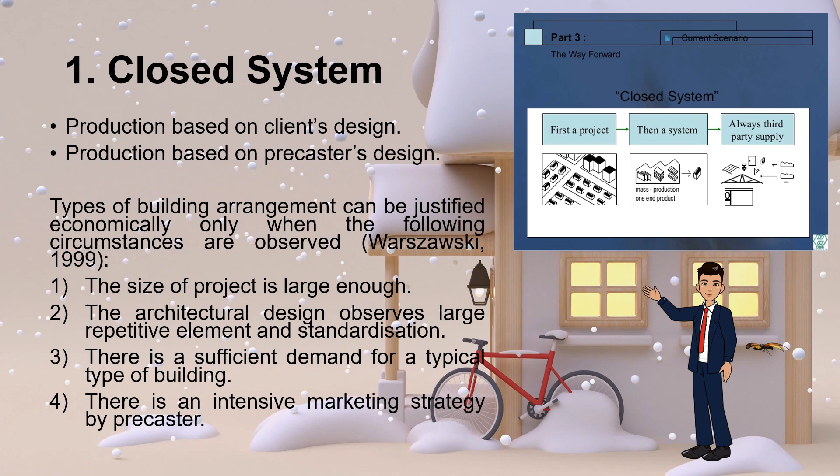In respect to this, a novel prefabrication system can overcome the requirement of many standardized elements by automating the design and production process. Number 3. There is a sufficient demand for a typical type of building such as school so that a mass production can be obtained. And number 4, there is an intensive marketing strategy by precaster to enlighten the clients and designer the potential benefit of the system in terms of economics and non-economic aspect.

In view of the limitations inherent in the closed system, an open system, which allows greater flexibility of design and maximum coordination between the designer and precaster, has been proposed. This system is plausible because it allows the precaster to produce a limited number of elements with a predetermined range of products and at the same time maintaining architectural aesthetic value.

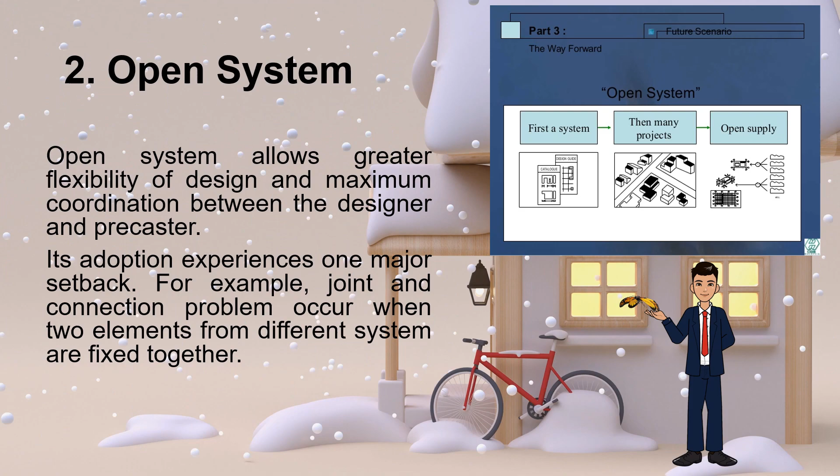In spite of many advantages inherent in an open system, its adoption experiences one major setback. For example, joint and connection problems occur when two elements from different systems are fixed together. This is because similar connection technology must be observed in order to achieve greater structural performance.

Modular coordination is a coordinated, unified system for dimensioning spaces, components, fittings, and etc. so that all elements fit together without cutting or extending, even when the components and fittings are manufactured by different suppliers. The objectives of modular coordination are: number one, to create a basis upon which the variety of types and sizes of building components can be minimized.

Through a rationalized method of construction, each component is designed to be interchangeable with other similar ones and hence provide a maximum degree of freedom and choice offered to the designer. This can also be accomplished by adopting a relatively large basic measurement unit or basic module and by limiting the dimension of building component to recommended preferred sizes.

Number 2. To allow for easy adaptation of prefabricated components to any layout and for their interchangeability within the building. This is achieved by defining the location of each component in the building with reference to a common modular grid rather than with reference to other components.

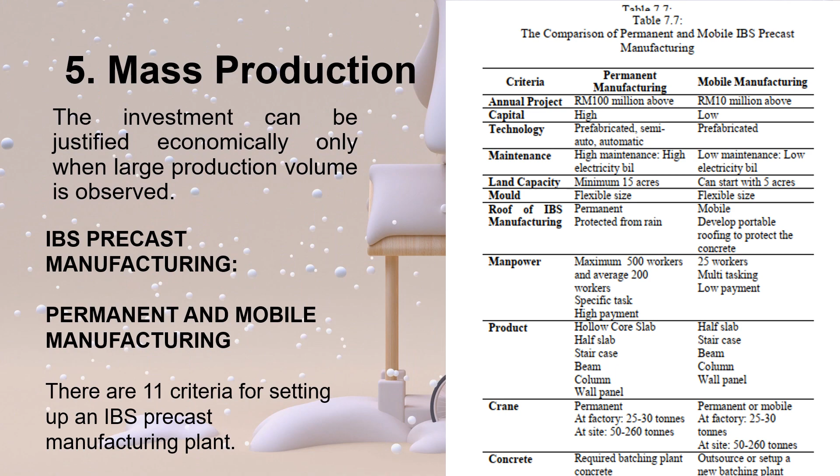Mass production. The investment in equipment, human resources, and facilities associated with industrialization can be justified economically only when large production volume is observed. Such volume provides a distribution of the fixed investment charge over a large number of product units without unduly inflating their ultimate cost.

Most of the IBS manufacturers were concerned with the value of returns that could be obtained from the project before the setting up of the IBS precast manufacturing plant, and a rule of thumb for the profit margin for an IBS project is around 10%. Usually, the large IBS manufacturer player will target a minimum production value of 100 million annually, and the new player will target a minimum project value of at least 10 million ringgit annually.

The new IBS manufacturer player will choose the mobile manufacturing plant, which requires a lower initial capital, and the average initial cost for the setting up of the plant is about 1 million ringgit. Although the big IBS players have the capacity for setting up a permanent manufacturing plant, the initial capital will cost about 15 million ringgit to 25 million ringgit, and it is 15 to 25 times the cost for setting up a mobile IBS manufacturing plant.

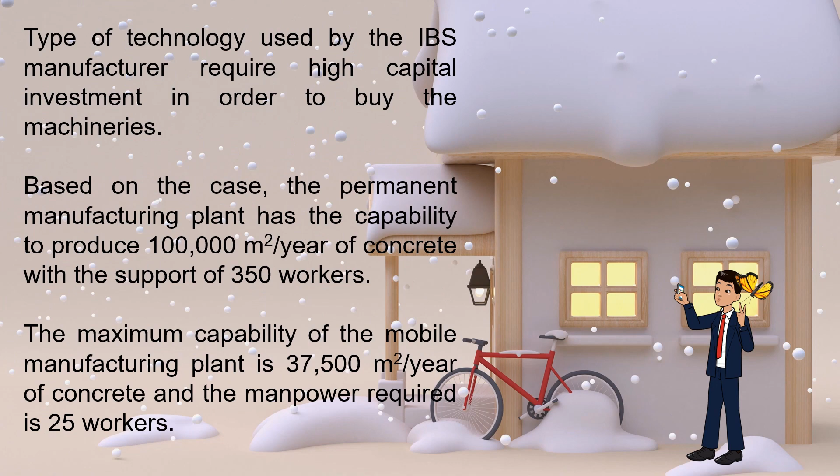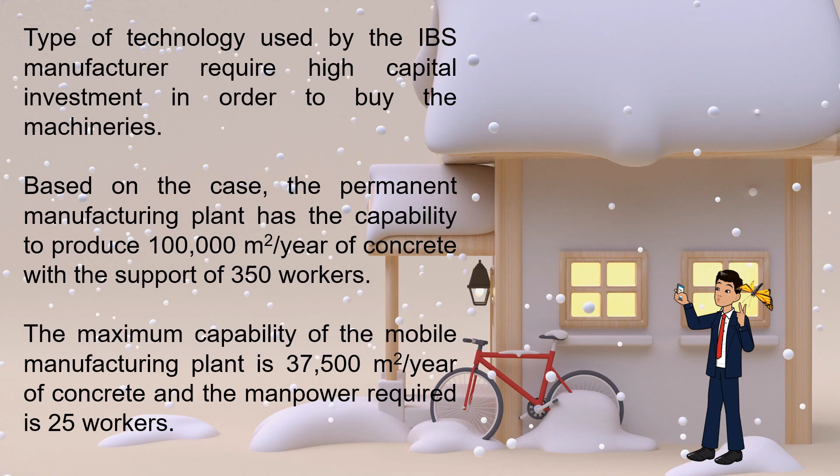The mobile manufacturing plant will have a mobile or permanent crane to erect the IBS components and set up the batching concrete plant. If the capital for setting up the mobile manufacturing is limited, they can outsource the concrete. Thus, the mobile manufacturer will not be required to focus on the inspection of the concrete, as the concrete is easily cast into the mold.

In addition, the mobile manufacturing plant is open air, and the advantage in a tropical weather country is the use of the sun for natural curing, and therefore it will be able to save costs. However, Malaysia has heavy rainy seasons, and it would affect the manufacturing process. The creativity of the manufacturer to overcome this matter is by designing portable roofing, which acts to protect the concrete work from the rain. After the concrete has been cast into the mold, the concrete will be covered with canvas and the portable roofing can be moved for the next concrete work.

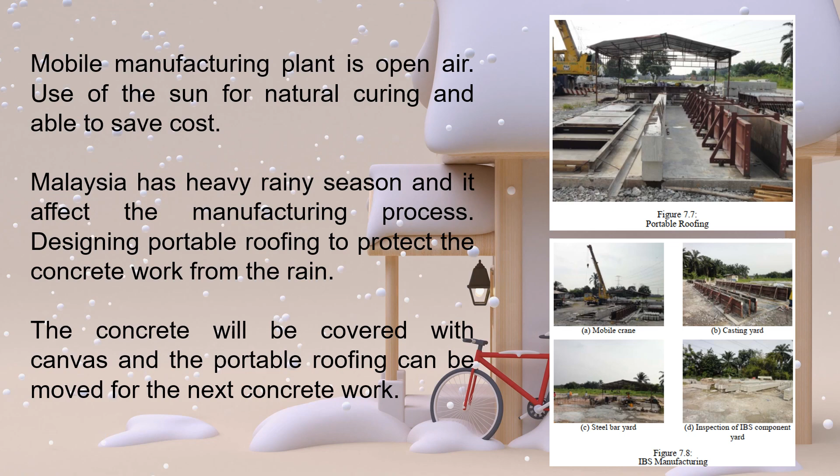Large production output and standardization of precast elements allow a high degree of labor specialization within the production process. The process can be subdivided into a large number of small homogeneous tasks. In such working conditions, workers are exposed to their work repetitiously with a higher productivity level.

Good organization. Production requires an efficient organization that experiences high production volume, specialization of work, and centralization, capable of a high level of planning, organizing, coordination, and control functions with respect to production and distribution of the product.

Integration. In order to obtain an optimal result, a high degree of coordination must exist between various relevant parties, such as designer, manufacturer, owner, and contractor. This is achieved through an integrated system in which all these functions are performed under a unified authority.

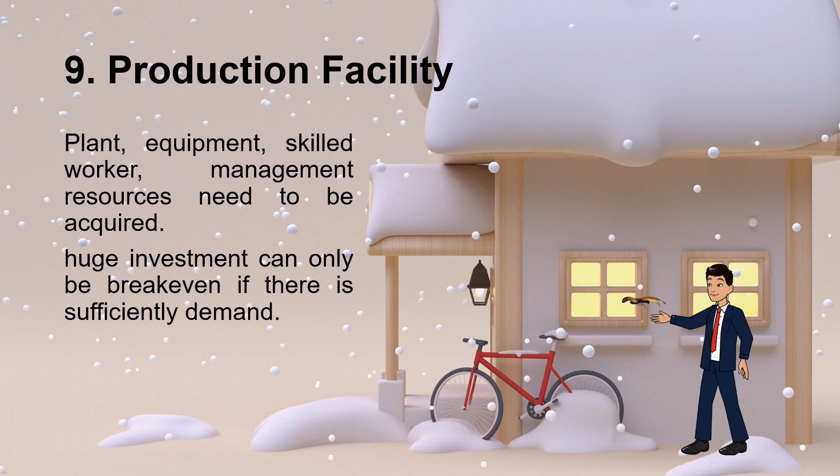Transportation. It is found that casting of large panel systems can reduce labor costs up to 30%. However, these cost savings are partially offset by the transportation costs. The transportation of large panels is also subject to the country's road department requirements. This limitation must be taken into consideration when adopting a prefabrication system.

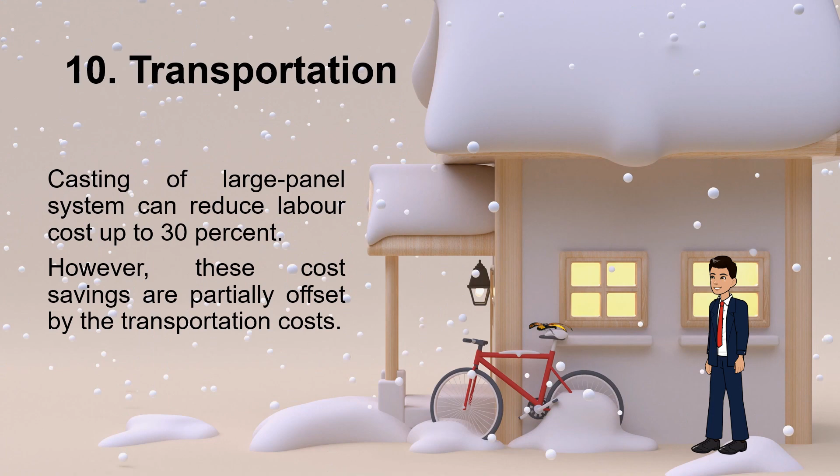The size and weight of the completed unit may limit the design, and both these aspects need careful consideration at the design stage. Size is perhaps easier to quantify than weight, as there are predictable limits which have to be recognized. The three obvious dimensions that need attention are length, width, and height. The length of a volumetric unit should not exceed 12 meters, which is a normal vehicle length.

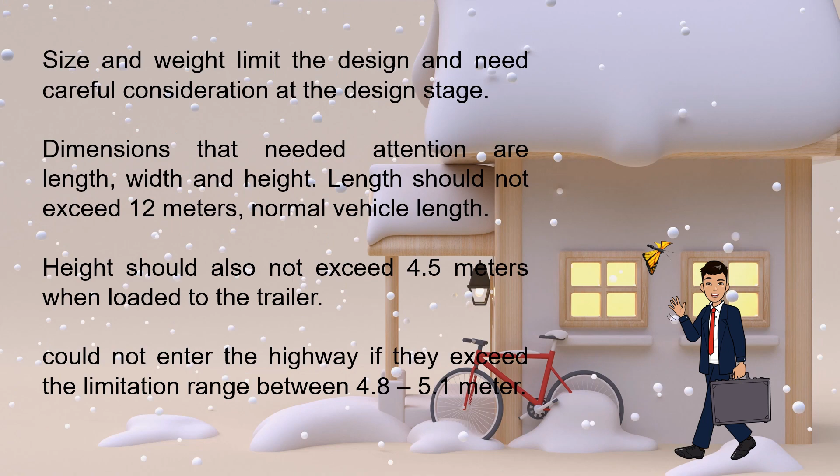The precast component height should also not exceed 4.5 meters when loaded onto the trailer. The precast component could not enter the highway if it exceeds the height limitation, which ranges between 4.8 to 5.1 meters. There are further impositions faced when road bridges or tunnels are below this height in some localities, and limitations at the site. The weight of each component of IBS precast concrete should not exceed 7 tons to ensure that the crane can easily erect and transport the material to the site.

Most experienced manufacturers will send their trailer to survey the road condition and be aware of barriers, especially for new construction site locations. If the trailer needs to enter a village road or federal road and is blocked by trees or electric cables, they need to overcome these matters before delivery of the IBS precast components.

The limitation radius of transporting IBS components to the site is around 50 km to 200 km. Meanwhile, the suitable distance from the new potential development area to the fabrication plant should vary from 50 km to 100 km.

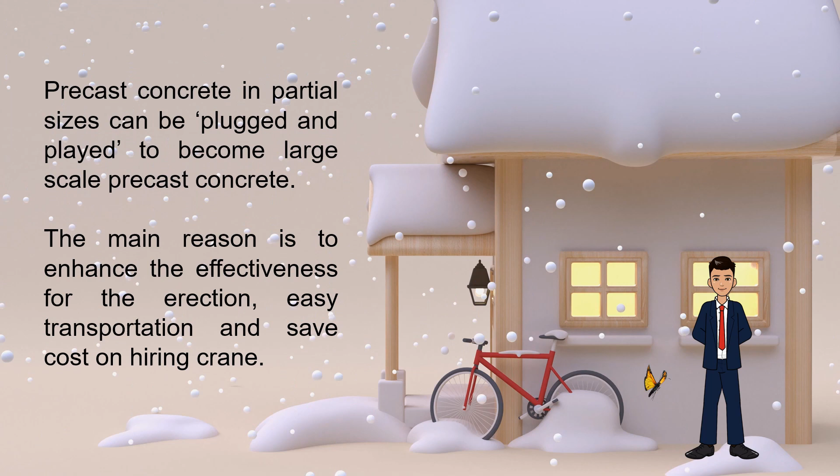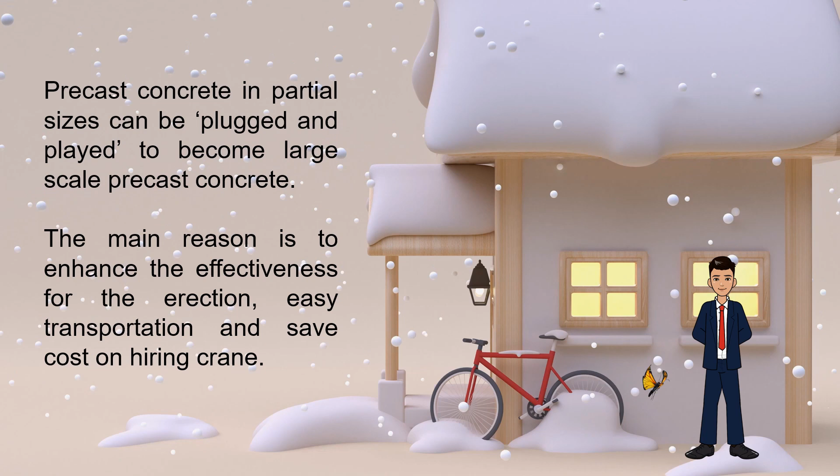Apart from the effective distance to transport the IBS components to the site, it is also important to have the precast concrete in partial sizes which can be plug and play to become large-scale precast concrete. The main reason why IBS manufacturers choose to produce partial sizes of precast concrete is to enhance the effectiveness of erecting the IBS components, ease transportation to the construction site, and save costs on hiring the appropriate crane.

Equipment at site. For the purpose of erecting and assembling precast panels into their position, a heavy crane is required, especially for multi-story buildings. It is therefore important to incorporate this additional cost when adopting a prefabrication system.

Before the IBS components are erected, all the IBS components need to have hooks for easy handling and erection. The lifting and installation of IBS component units requires a high degree of skill and high safety planning. The IBS components need to be designed with secure and correctly located lifting points. The lifting points should be matched to the distribution of the weight of the unit to ensure that the item will be lifted on a level plane.